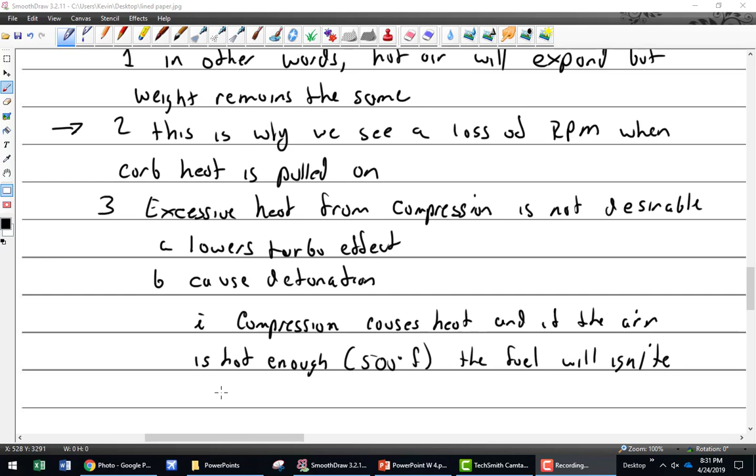Do they make coffee flavored vodka? Because it's... well, you can. I've heard. You have Irish coffee? Not your granddad's coffee.

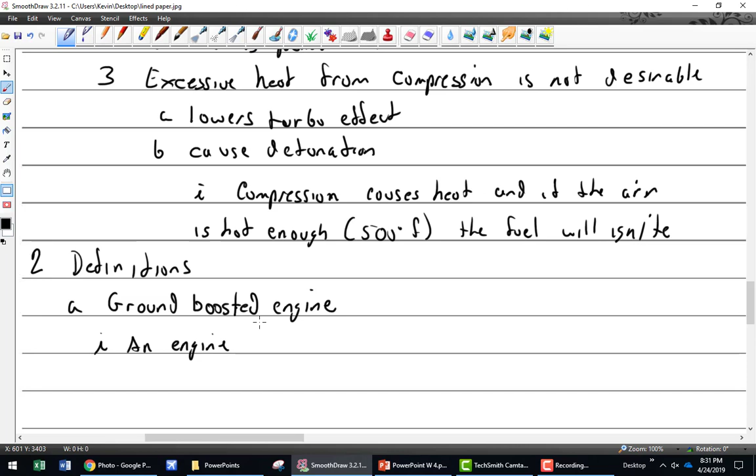So, a ground boosted engine. All right, so what is a ground boosted engine? That is an engine that has a manifold pressure above atmospheric on the ground. An engine that has a manifold pressure, MP, above atmospheric, on the ground.

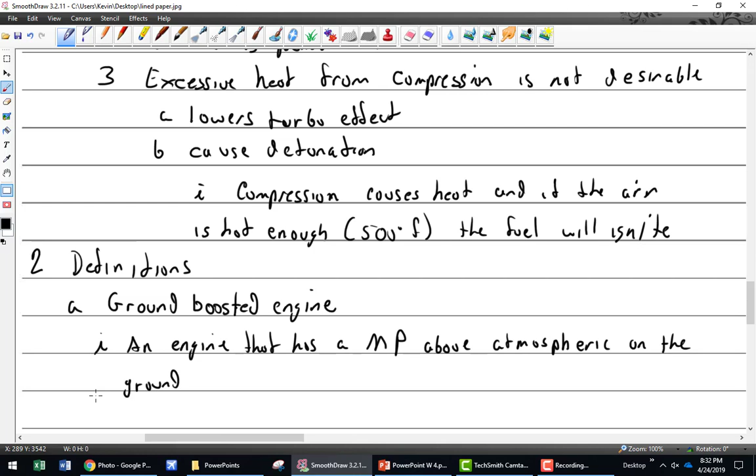So that is your turbo supercharged, if you will, right? It's been boosted. So if I say ground boosted, that's what you got. So the reason those have gears is because, like, some of them have different gears. It's because it'll taper off before. Well, they have gears? Like, some of them have different tiers of the supercharger.

Okay, so if we were specifically talking about a supercharger, now I just said ground boosted. So turbocharger, no, it won't have gears, and we'll get to that. But yes, engines that have an internal supercharger actually have multiple speeds to them. So they have not just one. So, ground boosted. Okay, then we have turbo normalized.

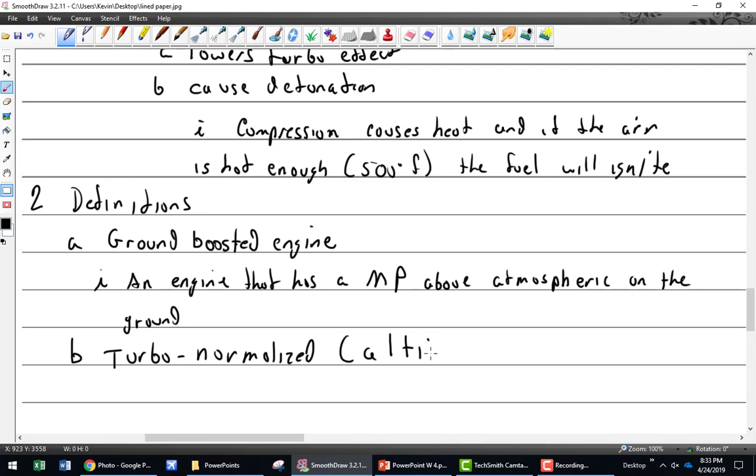Sometimes called an altitude engine. I don't particularly care for this term, mostly because I can't equate it to something that wants to make sense. But turbo normalized does make sense to me. It's just making the engine normal.

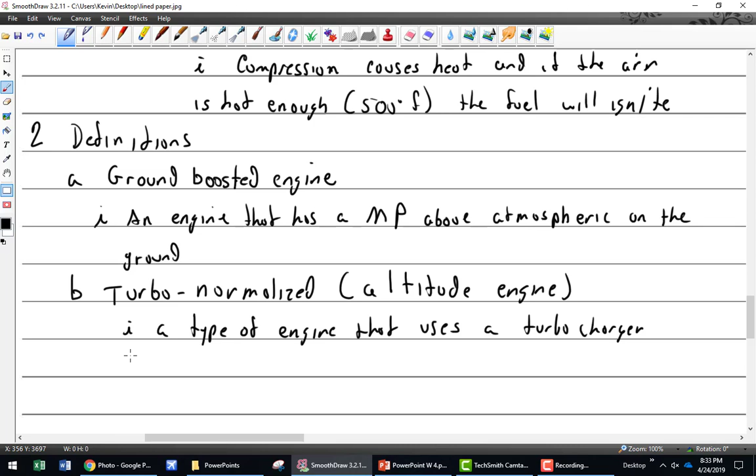So that is a type of engine that uses a turbocharger or supercharger. Well, I shouldn't say that because I'm going to call it turbo normalized. We'll just leave it as a turbocharger. An engine, turbocharger, to generate sea level pressure in the intake, up to its critical altitude.

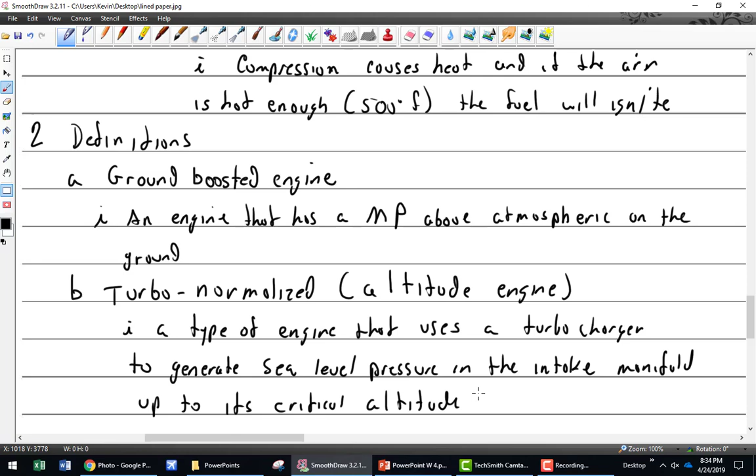So again, that's an engine that on the ground at sea level, the turbocharger lets the engine think that it's on the ground at sea level. And then it goes up to 1,000 feet, and the turbocharger lets the engine think that it's on the ground at sea level. And as it climbs, it's going to keep letting the engine just think that it's at sea level, except if you're constantly keeping the intake manifold, it will say 30 inches. You go up higher, 30 inches, up higher, 30 inches, up higher, 30 inches.

What's the trade-off that nobody's really talking about here? Well, we are now. More fuel consumption. Okay, guy's a cheapskate, always thinking about his fuel consumption. Yes, more fuel consumption, but you have more power, more speed. But what is the trade-off here that is...

You're generating heat. So the air is getting inside the intake manifold, and it's getting hotter and hotter and hotter. So are you really keeping the exact same horsepower on the ground as you are at 15,000 feet? The air is much hotter, so it's expanded, so it's different. You're also going up in altitude, which has lower ambient temperatures as well. Not by enough to compensate for that. You're getting closer to the sun, so that's not true.

Okay, Chris. Yes, Steve. Is it set for sea level all the time, or can you set it for different altitude? No, it's set for sea level. Yeah, all of these controllers, we'll talk about the controllers, which get a little complicated, but they're all preset. But there's different ones, and they all do their job, and we'll get to that.

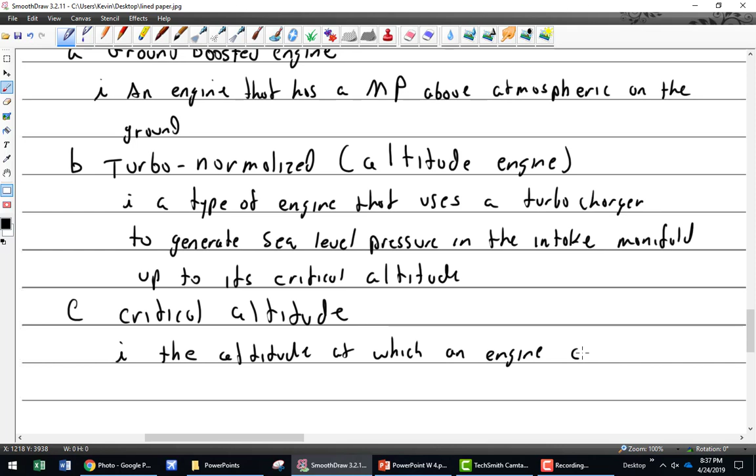And then you run into some more problems. So, up to critical altitude. Well, let's define critical altitude. Critical altitude is the altitude at which an engine can no longer produce sea level horsepower.

So Tyler informed me that he did listen to the automated weather service here today. About what time? I didn't listen to it. I calculated. Same thing, maybe 2,130. So he calculated that today our density altitude here is 2,130 feet. But we're really at what altitude? 75. So that's just strictly because of heat, or mostly because of heat.

So I go and I grab my little 150 and I pull it out of its hangar and I get in. What is the critical altitude for me today?

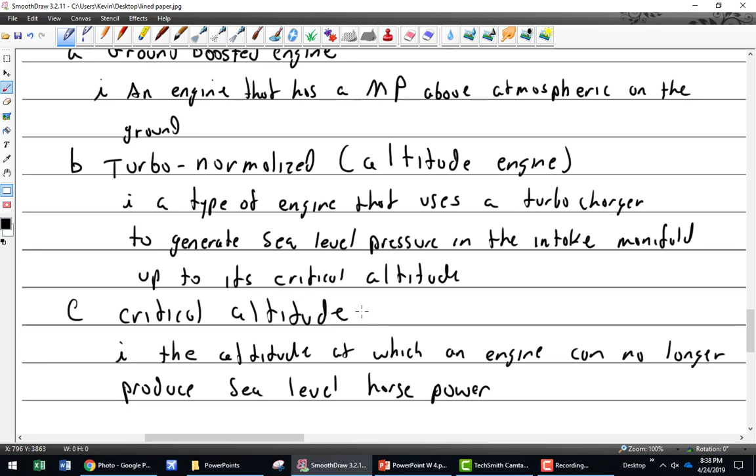What's the definition of critical altitude? Gonna be on service ceiling. No, not service ceiling. What's the definition of critical altitude? Okay, so the altitude at which an engine can no longer produce sea level horsepower.

So today, if I would have decided to go flying and the density altitude here is 2,100 and some odd feet, at what point would I have reached my critical altitude? Before you even take off. About the time that I pulled up to the aircraft and saw it, I already exceeded it. So the point being, even on the ground, the airplane already thinks it's at 2,100 feet, so it's already exceeded its critical altitude. So if it's a 100 horsepower engine, am I getting 100 horsepower today? Nope, not going to do it.

But assuming that it's a standard day and it's 59 degrees, or 15 for you, and the barometric pressure is 29.92 today, and I'm at sea level and I take off, at what point do I reach my critical altitude? The moment the wheels take off. So pretty much as soon as I get it 1 foot up.

All right, so to something Prince was asking a little bit ago. Remember I told you about how to determine if an engine with a fixed pitch propeller is producing its proper rated horsepower. How do you do that? RPMs. What's that? The RPM drop. Static RPM. Static RPM, not drop. So I put feet on the brakes, full throttle it, and look at my RPM. Now, when would I do that?

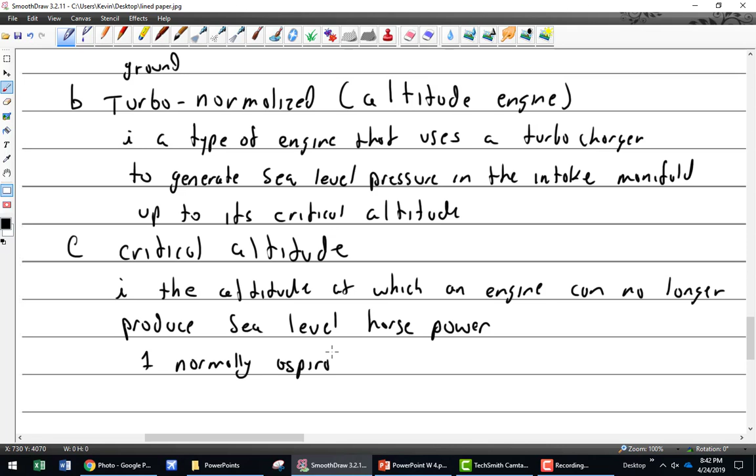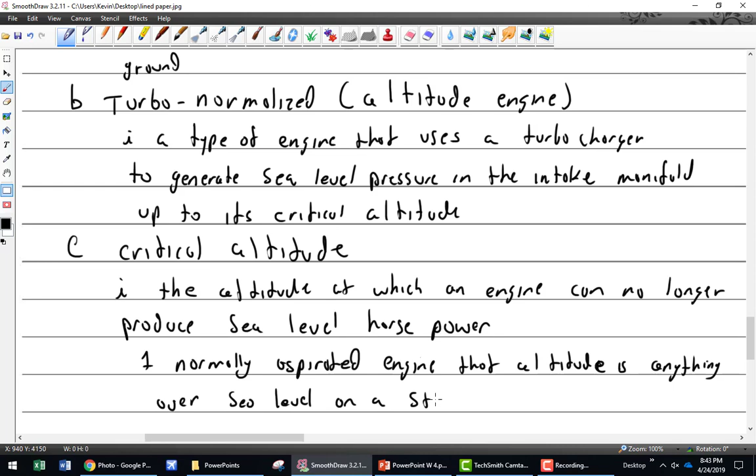In a normally aspirated engine, that altitude is anything over sea level on a standard day. So as soon as you take off, you're already losing horsepower.

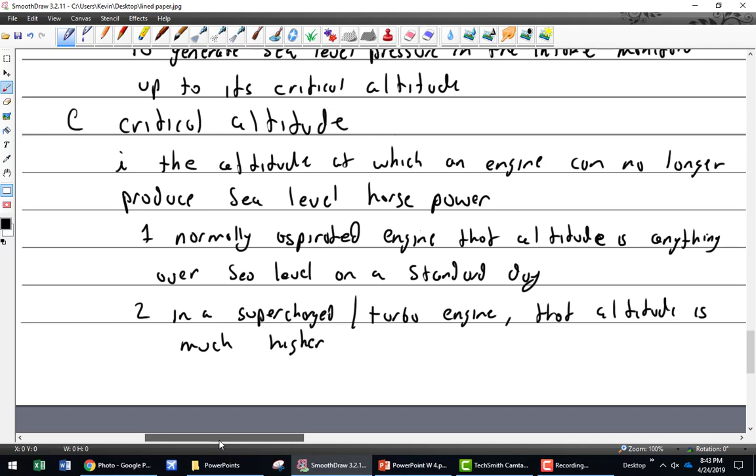But in supercharged or turbo engines, that altitude is much higher. How much higher? It depends on the engine and turbocharger and its condition. I think most of them are about 15,000 feet.

On bigger engines, is that more or less? It's going to depend on how big the turbocharger is. Turbochargers are all different sizes.

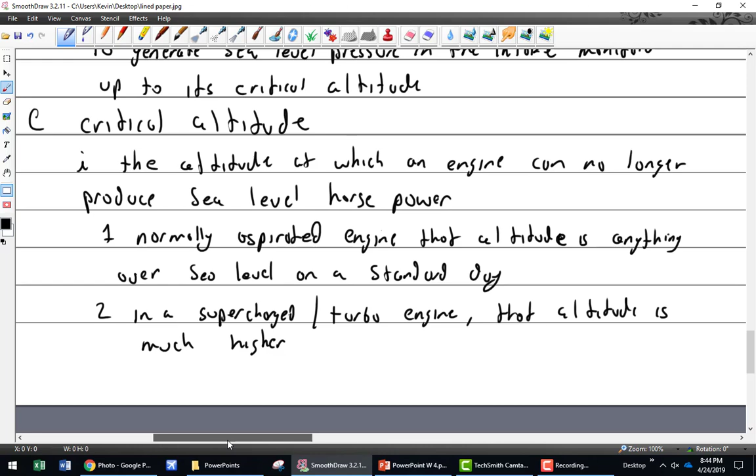Do you have a turbo on your plane? Oh, it's a little Cessna 150. It's not an aftermarket one—not to point fingers, but he doesn't even have a turbocharger on his plane. His plane is way nicer than my plane. You can do it aftermarket if you want, but he doesn't want it because it uses more gas. All the money went into those screens. I was gonna say leather seats. Yeah, we're making fun of your really nice plane. We're a little jealous. It is a really nice plane.

I know. All right, where did I leave off here? Critical. Okay, supercharging. So we talked about ground boosted, turbo normalized, critical altitude. Now we'll do supercharging.

Supercharging—notice the 'ing' on the end. Supercharging is boosting the manifold pressure above 30 inches of mercury, because that's now boosting it over standard temperature or standard pressure, which is kind of the same thing we talked about with ground boosting. Same thing.

What's the limit for that? I think 60, 50. Oh, it's totally an engineering design of the engine. A lot of engines can't handle much. Some engines handle a lot.

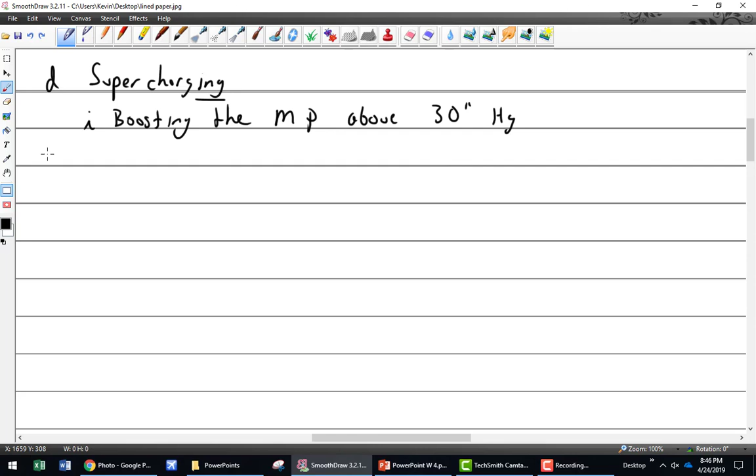So, is ground boosting and supercharging the same thing? Yes, but as I'm looking at my notes, I should have put supercharging / supercharger. No, I don't want to do that, I'll do it next time. So yes, I'll just say yes, and I'll change my notes a little bit: supercharging, boosting the manifold pressure above 30, and then supercharger. So one thing is a verb and one thing is a noun.

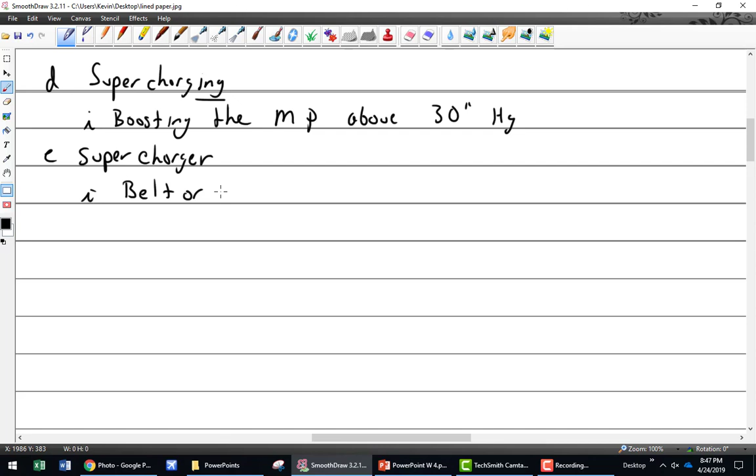Supercharger—that is a belt. I was going to say, not on airplanes, but wait, belt or gear driven? They use chains on superchargers as well. Not that I've ever seen, but not nowadays. It's a belt or gear driven compressor.

That boosts manifold pressure—I would just say it boosts manifold pressure. Honestly, all the superchargers that I know of, on all the planes, boost manifold pressure over 30 inches. I'm sure there's something out there I'm not thinking of, but if you look at some engines like the Lycoming round engine, the R680, it has what looks like an internal supercharger, but it turns at a speed that doesn't boost, it just mixes the air. So they call it a diffuser. If they would have spun it faster, they would have called it a supercharger, but it didn't work out that way. Or they didn't want to.

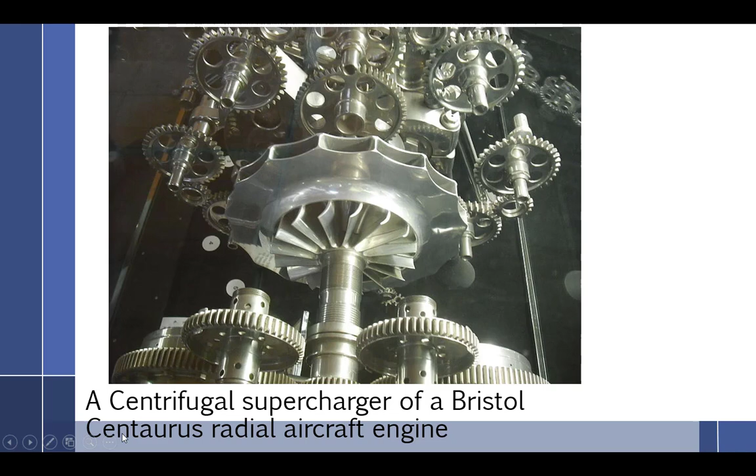That one? They spelled it differently for marketing. Oh okay, that's a sleeve valve engine. Well there you go, see? I don't even know what this engine is, but I thought it was beautiful when I was looking for something else and I saw that. I just have to show it because it's a work of art.

This is the two-stage supercharged Allison engine of the P63E, this version. So this one, I don't know if I want to get into this right now.

Two-stage supercharger. Two-stage means two compressors, just like a turbine engine, so we have a big one and a small one. Without even looking at the flow, if I have a big compressor and a small compressor, which one comes first? The big one. So it compresses it here, goes through, compresses it again, then off into the intake manifold.

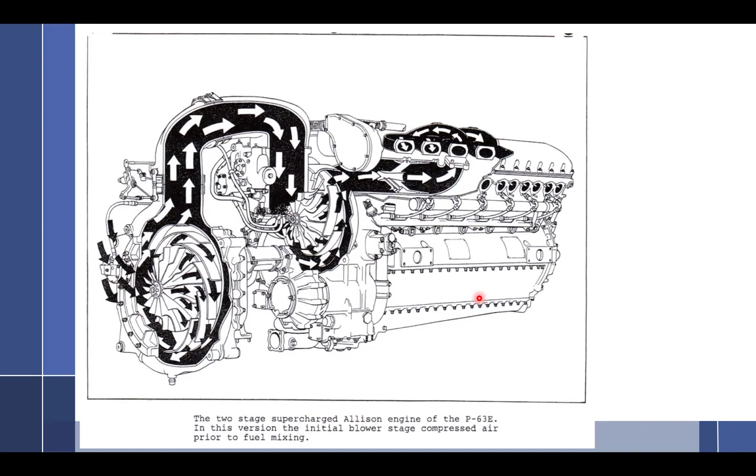So we have that. Let me see. Oh, and just for fun, even though Prince will probably tell me I'm wrong, this is Dago Red. Is that plane still in existence? No.

This is what I read about this, I don't know how true it is. Dago Red, for example, gets 75 PSI boost with a manifold pressure between 140 to 150 inches of mercury, and this is out of a 1,650 cubic inch V12 Rolls-Royce Merlin engine. That's a lot. It's modified, slightly modified.

Jets, right? Day one, were you worried about the fuel consumption on this one? That's just Spitfire, that's the P51. Is this the one that has like Lear wings on it? Didn't they put like Learjet wings or something? I don't know, they modified the wings a lot.

Yeah, all right. So anyway, I just saw that and thought, wow, 75 pounds per square inch. Based on your formula, that would be 2 gallons a minute. It's slightly insane.

This is what's called, sometimes you'll hear it called in aviation, a roots type blower. And where that's actually going to come into play is stuff like this, or something very similar, is actually used in some older aircraft for cabin pressurization. And of course, if you have something like that, you're probably not going to have turbine engines on it.

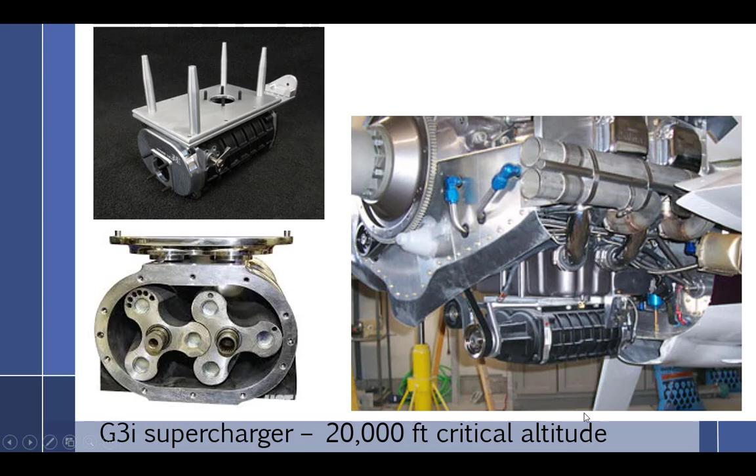All right, so we have supercharger. Let's see, I'm not going to write that Dago stuff on there because that was just for fun. Can you hear the supercharger, like those in-line ones like you can on a car? I've never even imagined that existed until I saw it online, so I don't know what it would sound like with the propeller, but pretty cool.

You probably can. Well, the Merlin is pretty noticeable, I was gonna say, some of those you can feel it. Yeah, all right.

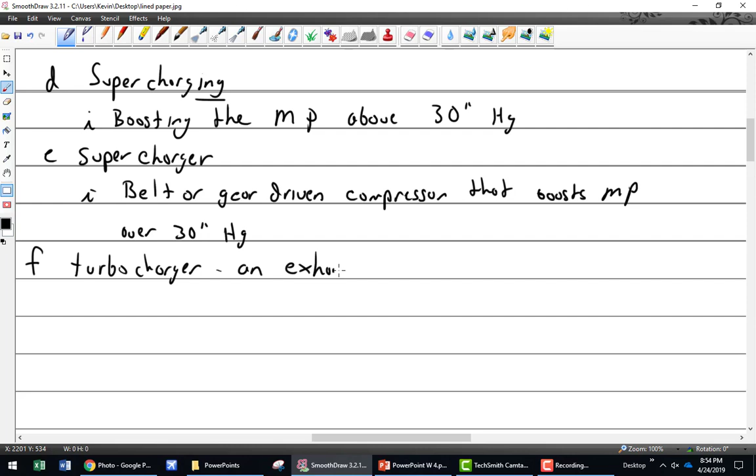So let's throw out a couple more definitions just to make sure we're up. Turbocharger, and that's an exhaust driven compressor.

And I've got turbo normalizer again, turbo supercharger again, manifold pressure and upper deck. All right, we already know what all those are, so I think we can stop right there with that one. That covers some definitions.

And what is the whole purpose? That is increased manifold pressure. Well, let's think this through. Increase or maintain manifold pressure. There we go, I like that. So increase or maintain manifold pressure.

If we increase the manifold pressure, what do we do to horsepower? All right, let's see.

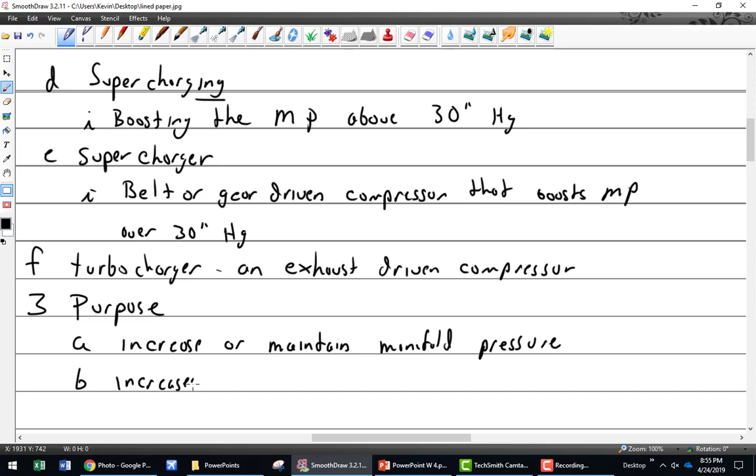What else does it do? It increases the weight of the fuel-air mixture delivered to the engine. There we go, Juan. There's your extra fuel burn.

Mock him, but here's a guy who flew across the Atlantic, so he knows what he's talking about when he talks about fuel burn.

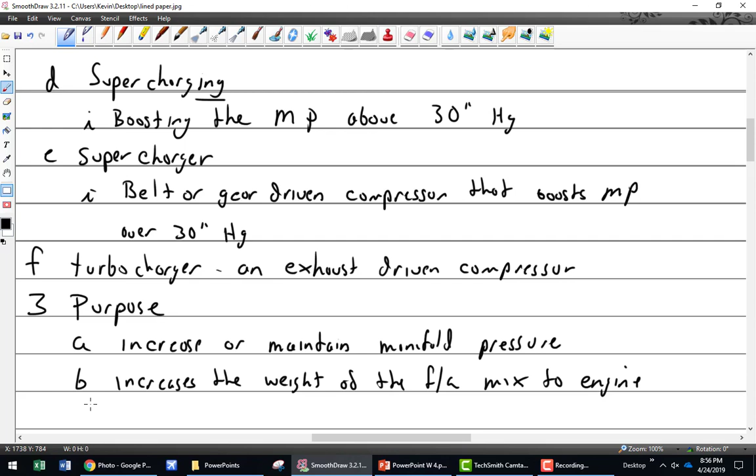So increasing the weight of the fuel-air mix to the engine keeps our horsepower where we want it to be. And also, we could say it increases the compression pressure.

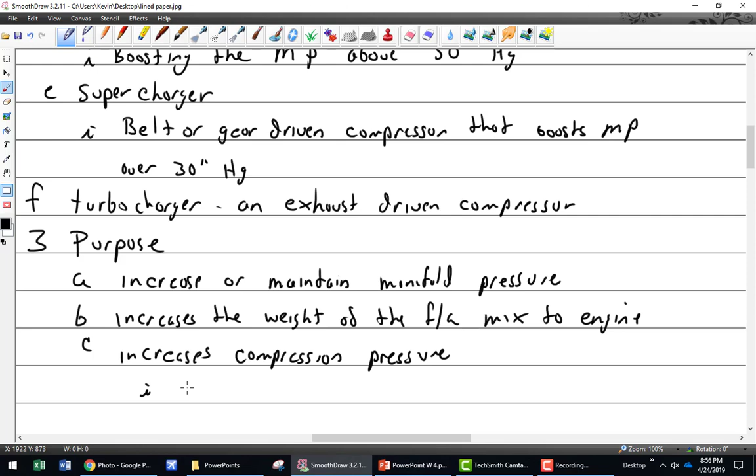Gee, and I hate to bring this one up, but let's remember that. Does it change the compression ratio? Yes. Thank you, I hear a no over here. Who said no? Good for you. So compression ratio is constant.

What is the compression ratio? Anybody care to define it? The volume difference between top dead center and bottom. All right, there we go. The difference between the volume of the piston at bottom dead center versus top dead center.

Does that change? No, nope. So the ratio between the piston at the bottom, the only way I can change it is to change pistons, rods, crank throw, something other than that.

So, all right, the greater the pressure. Let me write this for you. The greater the pressure in the cylinder at the beginning of the intake, the greater the compression pressure at the end. But that's not changing the ratio. It's just saying if I can get more air into the cylinder to begin with, I'm going to have more pressure when the piston comes to the top. So the greater the pressure.

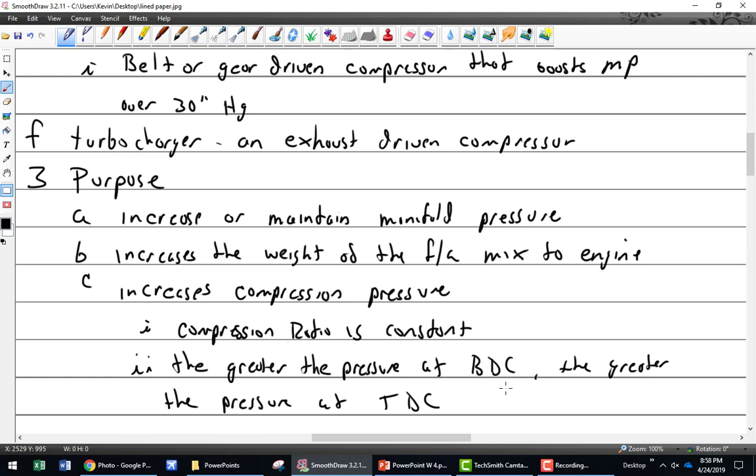Thank you, volumetric efficiency at work for you. The greater the pressure at bottom dead center, the greater the pressure at top dead center. And that means more volumetric efficiency, which means more power. Why does it make more power?

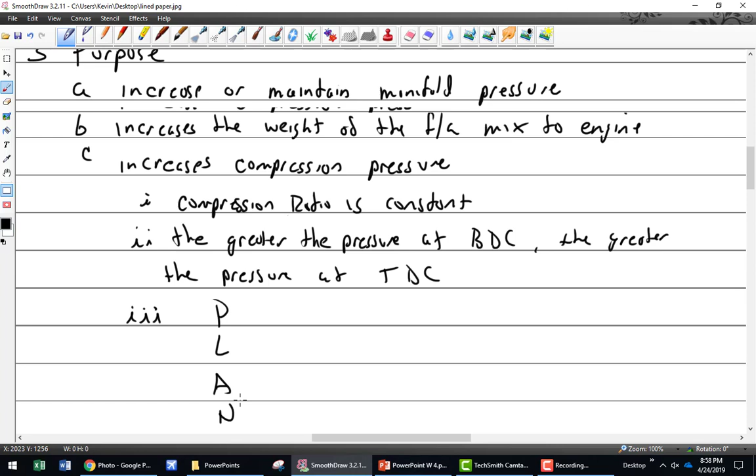Plank. Thank you, finally. Remember PLANK? These are the things you can change to get more volumetric efficiency.

No, volumetric efficiency... a turbocharger or supercharger will give you better volumetric efficiency because you're pushing the air into the cylinder now instead of letting it be drawn in.

Wouldn't a turbocharger though reduce volumetric efficiency? It would inhibit scavenging, to a point, yeah. So that's different. You're still forcing air in, so that's better.

Yes, so what effect does the density of the air have on this? Also, as you go up, you have to speak up for the mic. The engine not having to work as hard to turn the prop the same number of RPMs because the air is less dense, as you go up in altitude, right?

So if you normalized it and set the throttle and started climbing, wouldn't you, say at 4,000 feet versus 8,000 feet with the throttle the same at 4,000 feet? Okay, so you're saying yes, RPMs would be higher at 8,000.

So if it takes, let's just say it takes 120 horsepower to turn your propeller at 2,300 RPM at sea level, how many horsepower does it take to turn it at the same RPM at 4,000 feet? Less.

We know that just based upon how an aircraft performs statically. Do you have to be careful of going over red lines? And you have to be careful going over red line. Well, in a fixed pitch propeller, yes. In a constant speed, no, the governor should handle it. But there's always that risk.

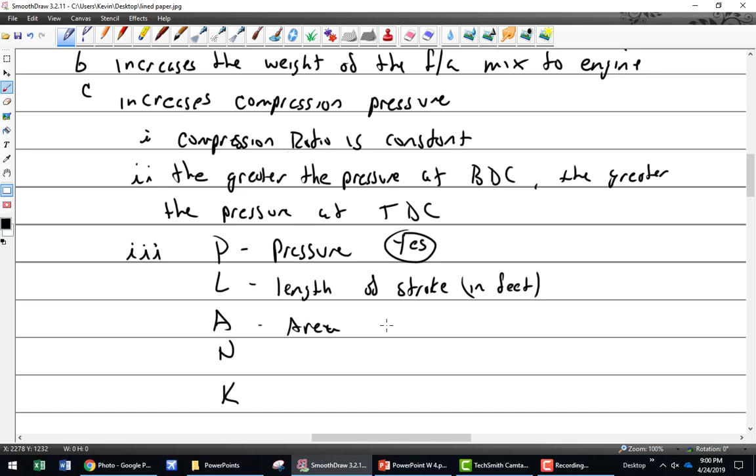A is area of what? Piston, area of the piston. Can we change that? No.

All right, so if we can change the pressure, we change the horsepower. So add pressure, we make horsepower, and we just proved it with our plank equation.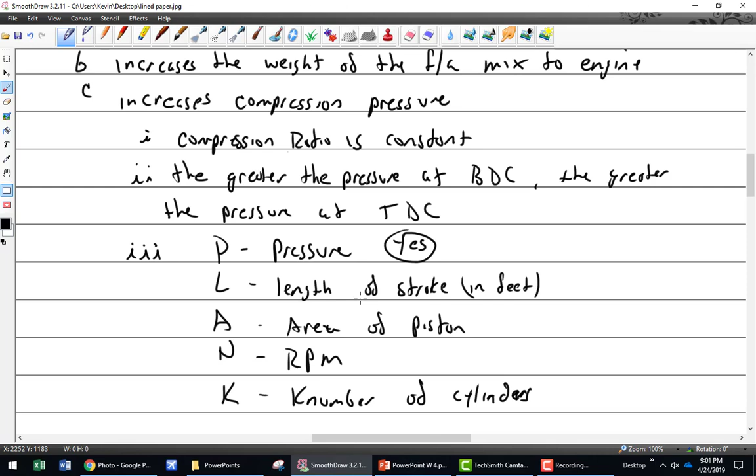I have a little example here. I'm not going to write it down, but a certain engine at 30 inches makes 550 horsepower. Note there's about a 1 inch loss across the carb, so 29 inches is possible, but 30 inches is impossible without a supercharger.

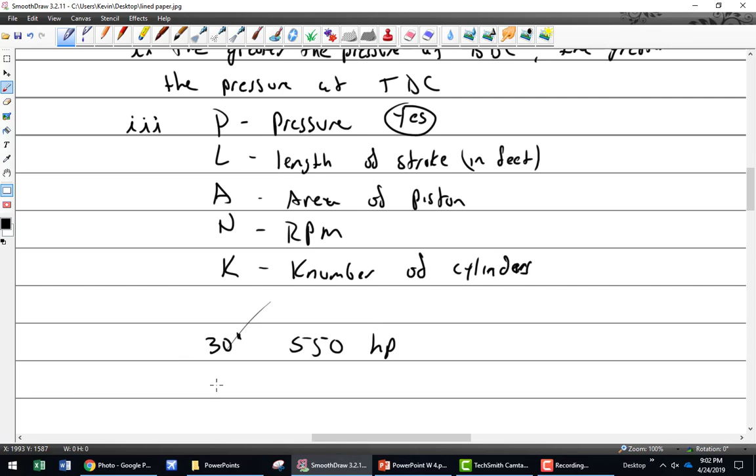Sidebar: so we had 30 inches, made 550 horsepower. At 35 inches, it ended up being 700 horsepower. This is just changing the pressure here, same engine. If I could get it up to 40 inches, I would get 875. And at 45 inches of mercury, I would have 1050 horsepower.

So, increase the pressure, it works. Now the manifold rating - military ratings have a chart like that with different model numbers for different manifold pressures. Why would you do that? Just for different usage? I'm lost on this one.

Okay, so I have this military book - U.S. Army Air Corps, World War II. It has the same engine and different model numbers. So exact same engine, different model numbers, and those different model numbers actually have different limits to manifold pressure.

One of the things you'll find with most turbocharged aircraft, they are low compression engines. So if you change the compression ratio at all, you're going to change what you can do with the manifold pressure. It's probably a piston change, design change, or as they progressed in metallurgy, stronger rods - that would change the compression ratio, change the strength of something, because at some point you're just going to blow the cylinder off.

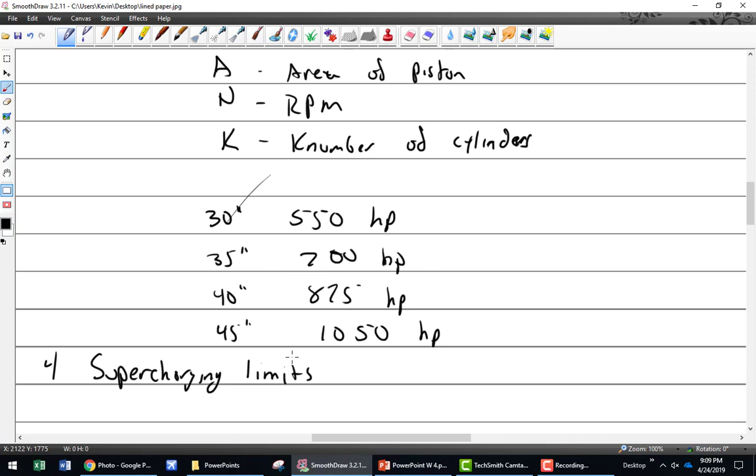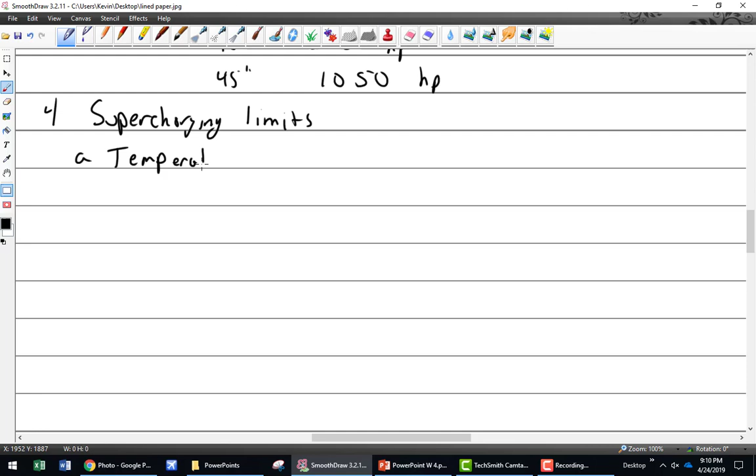Temperatures - as we said, as air is compressed, temp rises. And of course, I'm going to have to start cutting out some of the little notes here - I think I'm being redundant and we're running out of time. As temp rises, as we said, when the temp rises, the density of the air goes down, and that's bad.

Also, increased temperature causes a risk of detonation, and - I don't want to say pre-ignition - but it's certainly light off. Get to a certain point, 500 degrees, and you're going to light off the fuel in the intake manifold. We have an engine design limit.

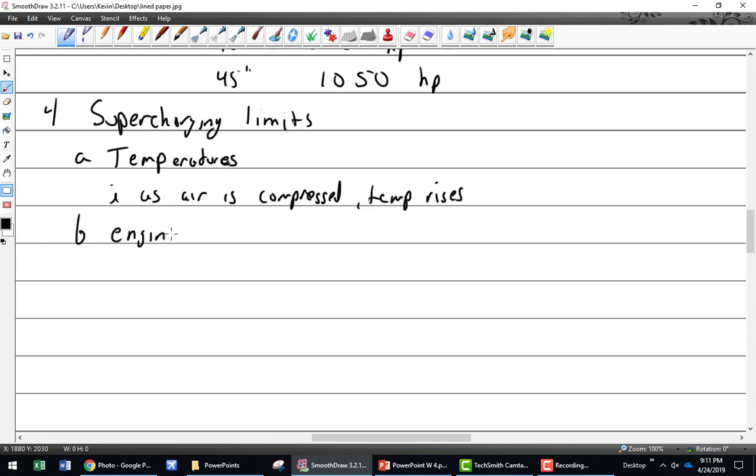At some point you're going to run out of stuff here, but I think this is kind of interesting and you guys seem really tuned into this stuff. So I'll tell you, for a 710 horsepower engine to get 1,000 horsepower, that's an additional 290 horsepower. So the thing is, I got a 710 horsepower engine and I really want to get 1,000 out of it. Okay, so I got to do something to it.

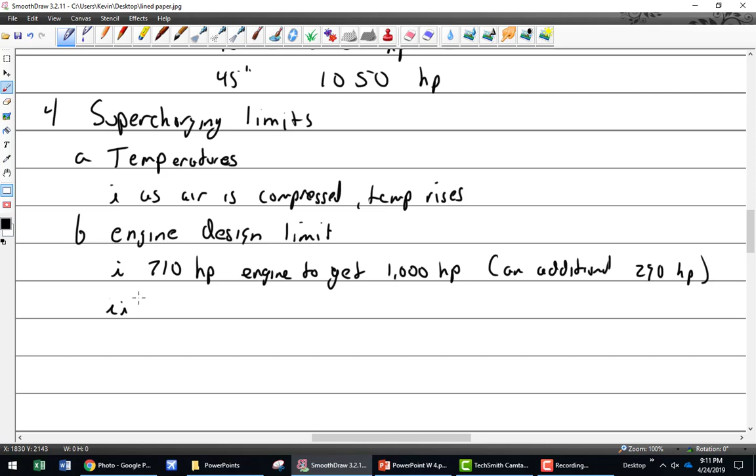So I say, I'm going to get one of these bolt-on superchargers. It takes about 70 horsepower to drive the supercharger. So I wanted to get to 290 additional horsepower, plus I got to add the 70 that I'm going to use to drive the supercharger. So that's going to equal 360 additional horsepower to get the 290. So you're really asking a lot from an engine that was designed for 710, aren't you?

Do you ever build engines that people call and ask about putting a supercharger on for them? No.

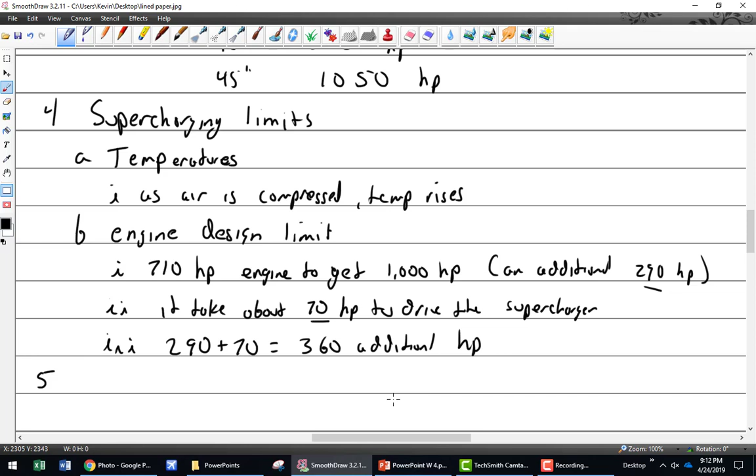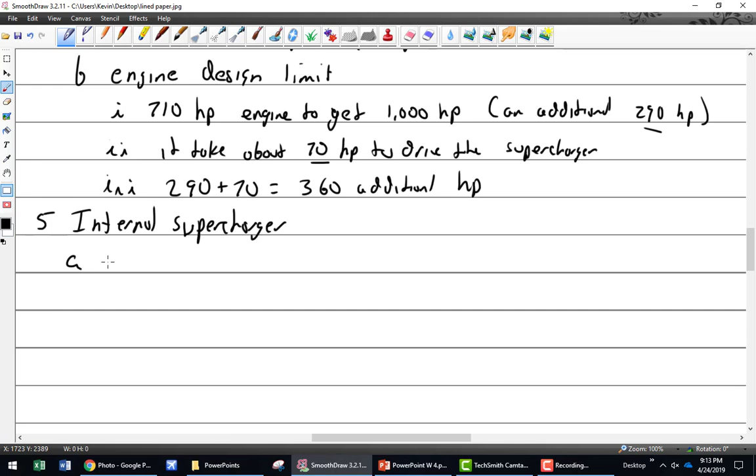All right, let's talk about an internal supercharger. What is it? Well, it consists of a gear-driven—could be belt, but that's pretty rare, it's that funny thing I showed you—gear-driven centrifugal compressor. That's the way most of them are, which could also be called a diffuser. Or it consists of a centrifugal compressor and diffuser.

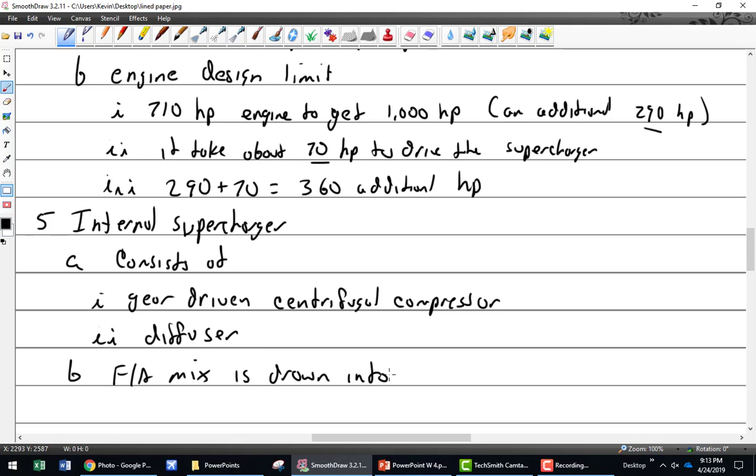So the fuel-air mix is drawn into the compressor. So what's entering the compressor? Fuel and air. So after the compressor, it's got fuel and air in it.

And I make that point because you have to think about aircraft that have cabin pressurization. Where is the cabin pressurization going to come from? Well, if it's a turboprop or jet engine, it's just going to come off bleed air, right? And bleed air is before the fuel is added. But if you have a big radial engine with this giant compressor, this giant supercharger, can you use that to pressurize the cabin? Thus the Roots blower that I mentioned—you got to do something different. You can't be running fuel and air in it, just rob it off there. But in a turbocharged engine, it's different—you actually use the turbocharged air to pressurize the cabin.

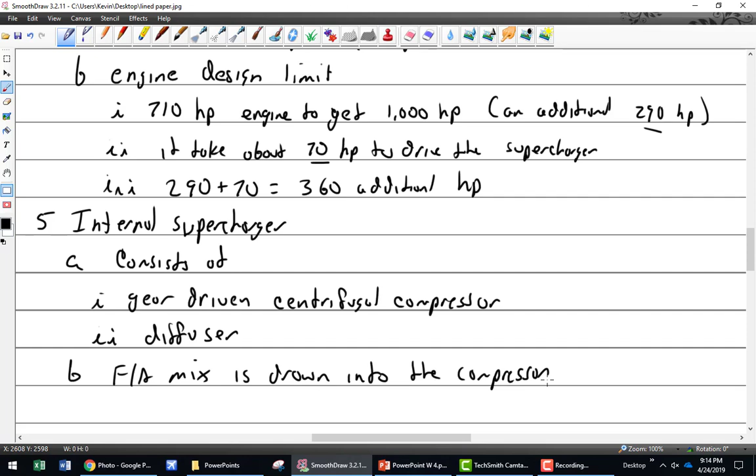That's right, because internal superchargers are almost always on radial engines. So in a radial engine, it's inside of the case—you can't see it—and it's usually in the accessory section, between the power section and the accessory section. So you have your pressure carburetor on the bottom, because these usually have pressure carburetors at this point. And as we saw in the drawing, the pressure carburetor is: atmospheric air comes in, pressure carburetor, fuel, air. Next thing is the compressor, the centrifugal compressor, off to the rest of the engine.

So you need a specific carburetor for that, don't you? You can't compress fuel, you can only compress air. Do you need a specific special carburetor? Yeah, like a PR58—PR58's fine. PR58's used on that. Same? Pratt & Whitney 985. I'm not even sure which carburetor that is—I think that's a small pressure carb, but I'm not sure.

Let's see—the compressor: fuel-air is drawn to the compressor from the carb, and thrown out into the diffuser. And of course that provides better fuel-air distribution. And from the diffuser, then it goes to the intake pipes and then to the cylinders.

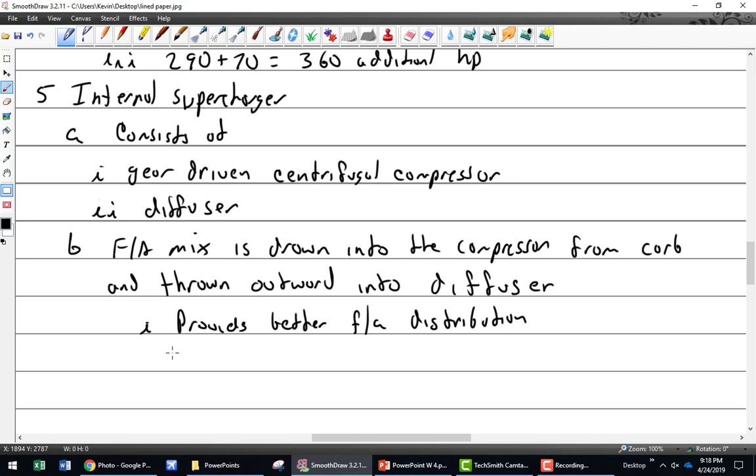So we will stop here, and tomorrow we will pick up with turbochargers.